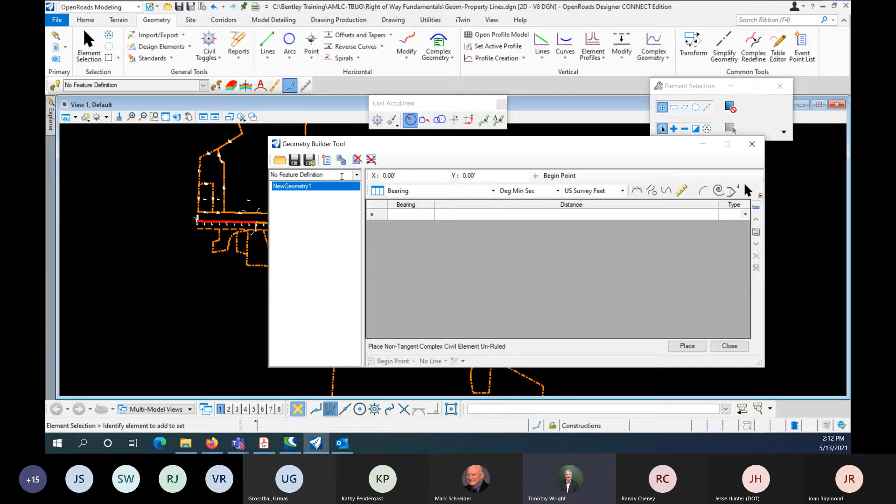Feature definitions, if you aren't aware, really drive the software. I cannot stress that enough, how much feature definitions matter. So one of the first things I'm going to do is set up my feature definition here.

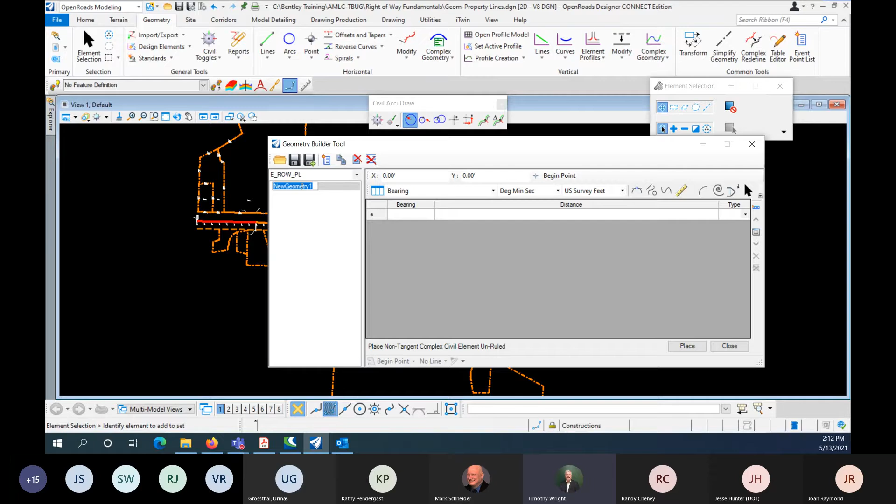We've got one defined for property lines, so I'm going to go ahead and select that. Then I can give this element a new name. Now this is going to be parcel 8 here, so I'm just going to type that in. And now I'm actually ready to get started here.

Now what this tool does is allow us to enter information, a lot of times the way we're used to reading it off the papers, or the legal description. You can see it's kind of row by row based here with a bearing and a distance. But before I do that, there's one thing I want to toggle on, and that's this button right here.

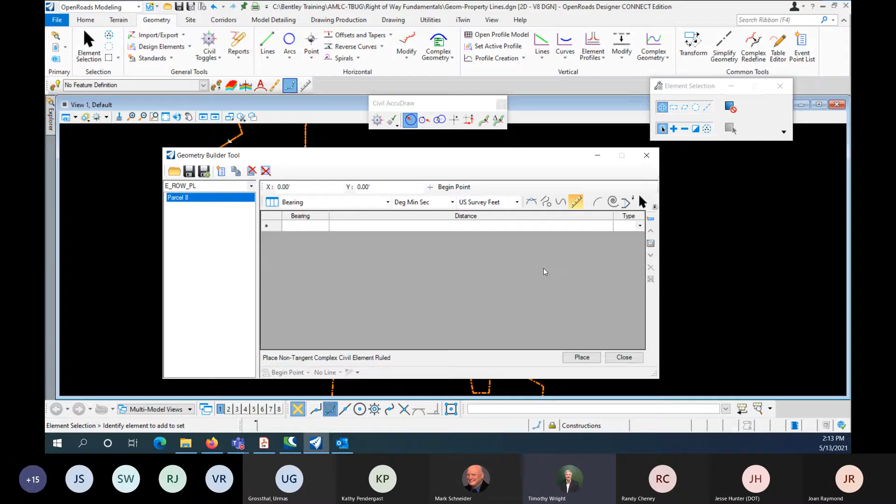And that tells me that I'm going to create civilly ruled objects, and what that means is basically intelligent lines. The lines themselves will know what bearing and distance they are. It's part of the new concept of the way we talk about these objects now.

I'm just going to throw some numbers in here. You can see that I can just use the space bar - that's kind of nice, I don't have to worry about that caret or any of the other ways we used to enter in things. Just hit enter, and it'll take me to the next field there. So you can see I can very quickly enter this data in just by using the space bar and the enter key. Get the numbers right, that's going to help.

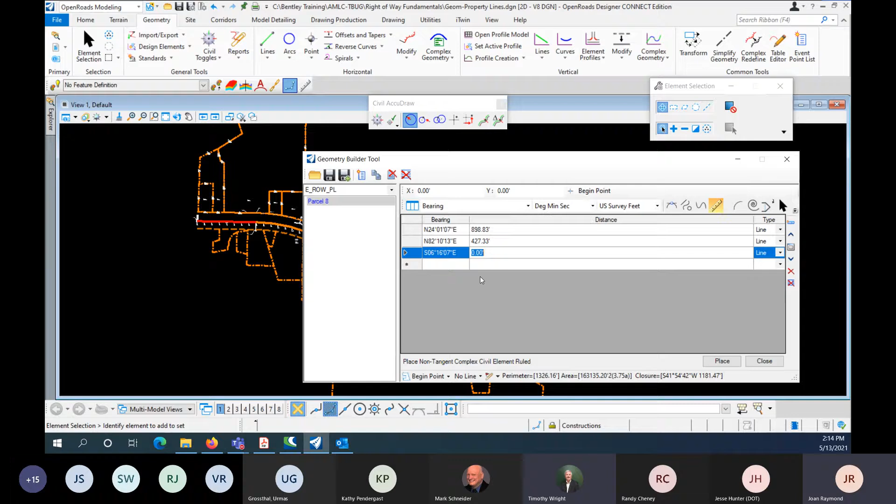As I work through this, feel free to type up any questions you have, or even if you want to unmute your mic real quick and just give a shout out. Like I said, we're going to have a lot of questions, I think, as we work through this, and those are always good - everybody gets to learn something. So I'm just going to finish wrapping this up and bring it home.

North 61, 16, 56 west, and 1074.69. Now, on this last line here, I always like to hit the enter key, but you'll see what it did then is made another element that just goes due north, at a 0 distance.

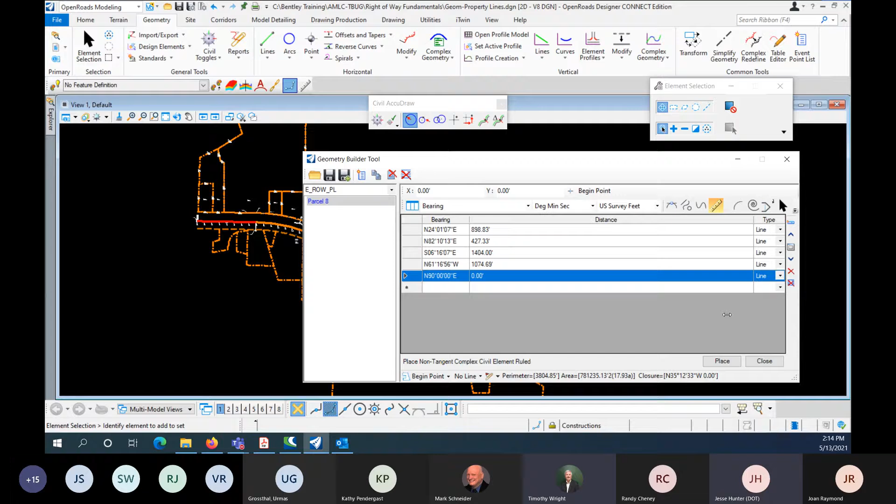So I'm just going to go ahead and select that last line and delete it. Okay, just nice and tidy. Now, before we place this out here, let's talk about some of the things that we see.

First of all, you saw how quick and easy it was to enter that information. You come down here and you've got a space where you can decide how the software interrogates the element. Right here where it says begin point, if I left click on that, you'll see that black drop down arrow. I can say this is not closed, and when it's not closed, that has the software looking at it more like an alignment. So you can see what I get basically as a readout is simply the length of that object.

Now, if I tell it this has got a begin point, it treats it more like a parcel. So there you can see I've got a perimeter, I've got an area including acreage—everybody likes to see their acreage, right?—and a closure. So you can see that we've got a good closure report.

So the way the software interrogates this element gives you clues right up front. You can kind of glance down there and say, oh, look, I must have fat fingered one of the numbers because I'm not closing correctly. So you could go back then and check your data.

Another nice thing about this dialog is we can save the object in an XML format. Now, unfortunately this isn't LandXML—I do have an enhancement request in to make it a LandXML format, but currently it's just kind of proprietary. All I need to do is come up here and say save this file, and that's going to bring it out here, and I can say this is parcel 8.

And what that'll let me do is later on I can bring that parcel back up and make changes on it if I need to.

Okay, so Tim, if you have an arc, are you going to talk about that? Oh sure, yeah. So if you want to put an arc in there, you just change the type here.

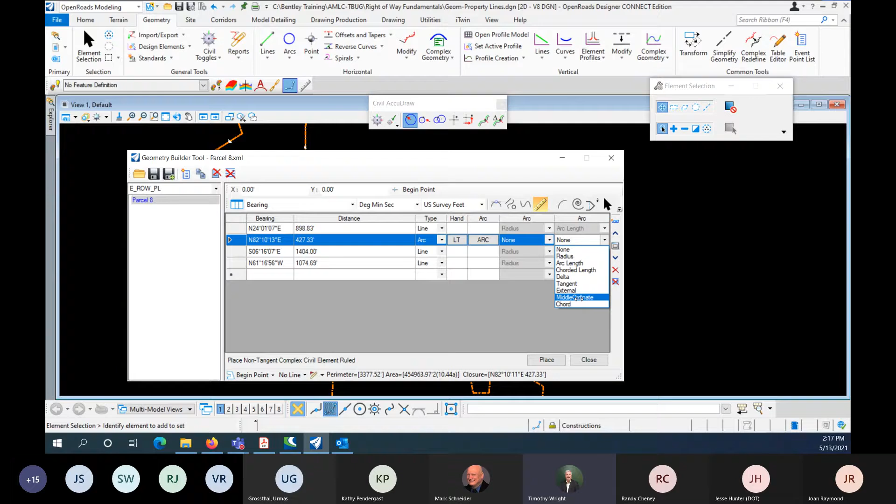And when you change something into an arc, you can define the two different ways that you can bring in an arc, right? First of all, maybe I have the arc length, and maybe I've got the tangent or something like that. You've got different options in here that you can actually tell it as you create that arc.

The different options there. And it will also do degrees of curve—you can put that in there with the D space and then the degree of curve there. Okay.

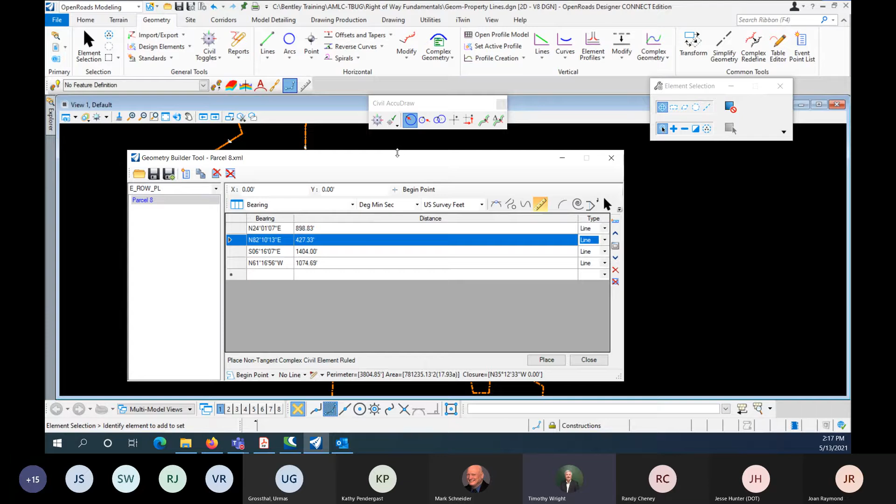Any questions? Now, let me illustrate something that's kind of confusing. If you go through this training on your own by yourself, the software or the training manual does something kind of wonky—all right, that's a technical term. And what it means is it's something that you would never really do in real life.

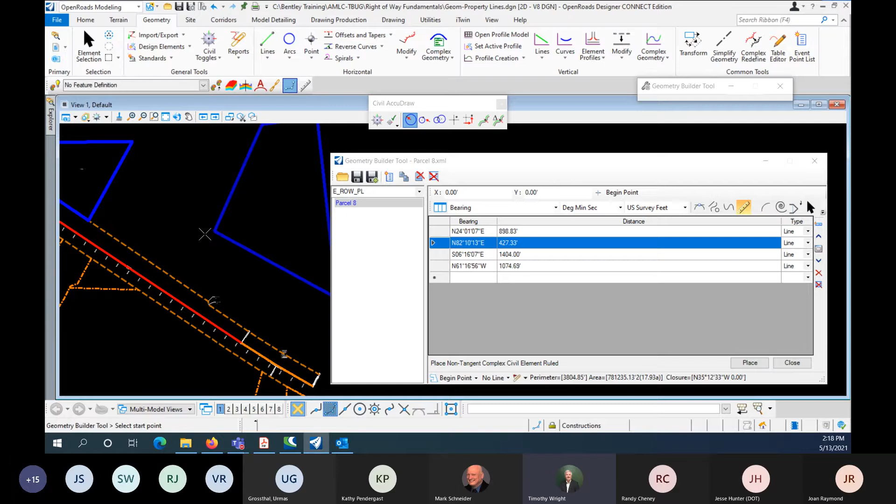So what the training material has you do is come out here and pick a beginning point, and we just throw it out in space. Now, like I said, that's not something that you would typically do, right?

You'd have your point of beginning there, and when you threw in your bearings and distances and all that, those would be real live numbers. But the manual here, the courseware, actually puts things off to the side so that we can use a new tool, and I'll show you that here in a second. So while I agree with the training material, as an academic thing to show you a new tool, in real life this isn't how we put right of way down, right? So just that's my disclaimer.

I got some pretty interesting feedback the first time I demoed this training environment. So I picked my point of beginning there, and like I said, the way I did that was just arbitrary—I clicked the little crosshair here, picked an arbitrary point and just threw it out there. You could also key in that value or snap on the point of beginning.

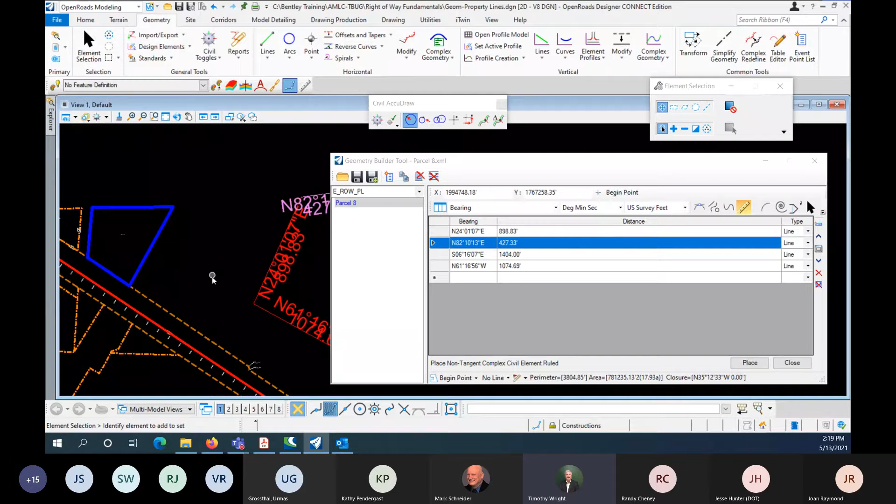And as we wrap this up, hopefully we'll have enough time, I can come back and show you how we would do this in real life.

But now that I've got that all set up, you'll see nothing has really been placed yet. It's kind of in a temporary place right now, and nothing really happens until I hit this place button over here. And now that element actually gets written to the file. Before that, it was kind of just a temporary graphic there.

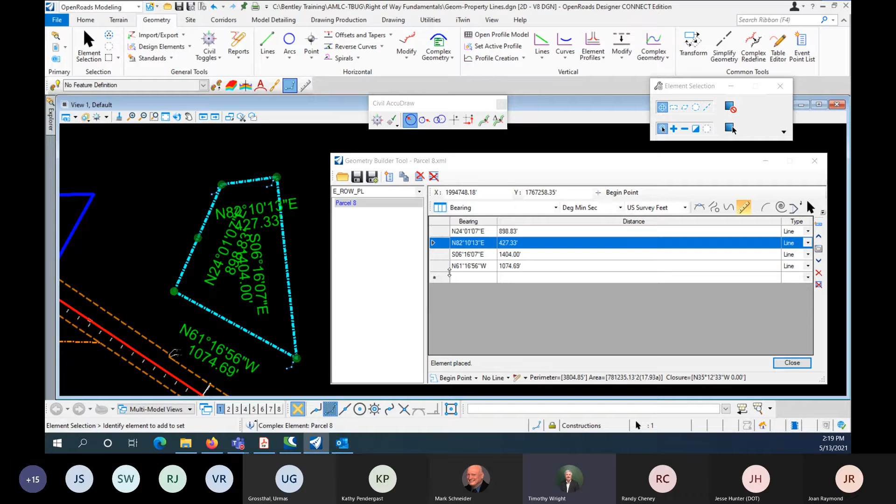So now as I come in and hover over this, you can see that it's a complex element. Its name is parcel 8, which matches the name we gave it here. And if I left click on it, you can see how that element retains that information. So there's my north 61 1656, you can see that represented there.

So now I can go ahead and get rid of this, and I'll go ahead and update my XML file there. Now, like I said, this is something that you wouldn't normally do in real life, but we're going to move this and rotate it.

Now, where do we need to rotate it to? Where is our point of beginning? Well, if we look at our legal description, what it says is from the beginning, or from this monument point here, we're going to go a set distance down the alignment. So that's like a delta station offset. We don't have a station called out, what we have is a distance from a point.

A lot of people look at Open Roads Designer and they're like, where's this COGO tool that I used to use? I want to use this tool because that's how I did my stuff. Well, a lot of times now things are kind of layered. One of the things we're going to do is pick a place point tool, which allows you to place a cell out there. And then we're going to layer it with Civil AccuDraw.

So I've got Civil AccuDraw up. Where that came from is this little windmill icon, the little spiky ball. I just select that and toggle it on and off. Now, I always tell everybody that Civil AccuDraw is either your best friend or your worst enemy. If you understand it, it's a great tool.

You can see in this mode, we can do a station or a distance and direction. We can do them unlinked. We can do a distance, or key in a true XY coordinate, something you can't do with regular AccuDraw because it's always working off of a delta. You can still do a delta, but this is where it gets interesting. Now we have a station and offset, and even a delta station offset, and that's the setting we're going to use here.

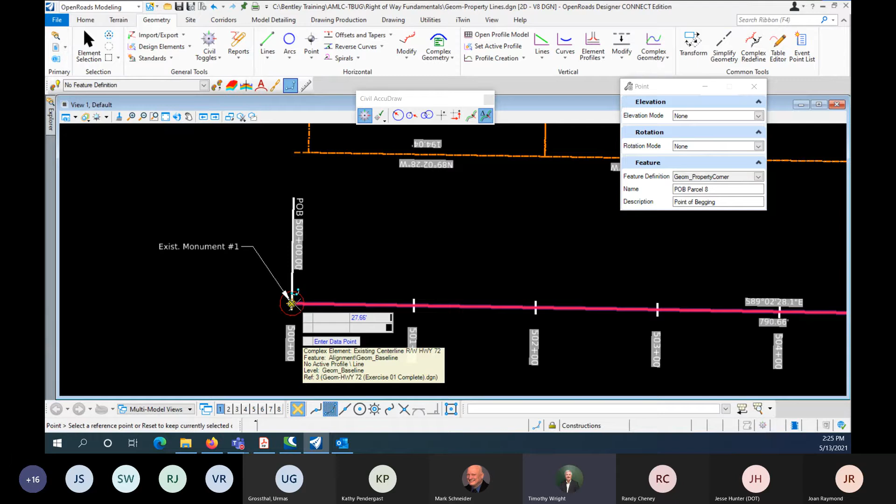So I'm just going to go ahead and set that point up again so everything's good to go, and again spot check it. There we go, at 100 foot. So I've got my point tool all set up, I've got Civil AccuDraw helping me out. Now I can enter that information.

So the delta value that I want is 2647.19. I hit enter and that will lock that in. And then when I bump my mouse, it might be hard to see on the screen, but you can see that little X is locked in at that station point now.

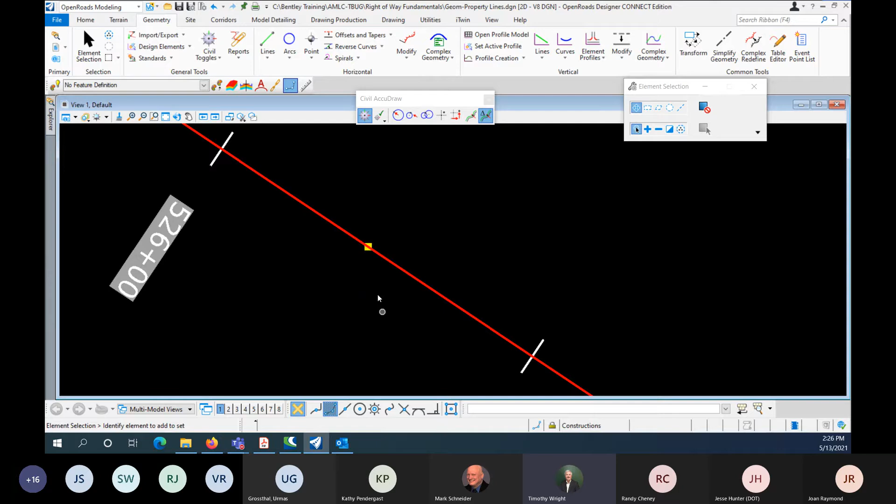Now all I need to do is set the offset to 0 because I want that cell placed right on my alignment. So now that both of those are locked in, I simply do a left click, and there it is. So now if I zoom into that point, you can see that cell up here. If I hover over it, it tells me what it is: point of beginning for parcel 8.

Now, this is another thing that kind of confuses people. When I select that cell, it remembers how it was placed, right? It was placed at a 0 offset and this distance from the beginning. Now, if you look at that, that looks like a chord distance, doesn't it? But that's just because they cut a few corners when they were doing the graphic for this and didn't trace that alignment. I guess they figured that would be a little horsepower overhead or something. So this is a true distance along the element, it just kind of looks like a chord distance. Don't get confused about that, it's actually drawn correctly. So now we've got our point of beginning.

Like I said, the training material here kind of works a little backwards, right? Usually you'd set your point of beginning and then draw your parcel based off of that. But then I wouldn't be able to show you this cool tool called the transform tool, which was located up here in the upper right-hand corner.

And the transform tool is really useful if you want to pick these smart elements up and move them. Because they have rules associated with them, you can't just come up here and pick your move tool and grab that element. You'll see you get the little no-go sign, right? That's because these elements have rules, so you have to use a special tool to do that, and that's the transform.

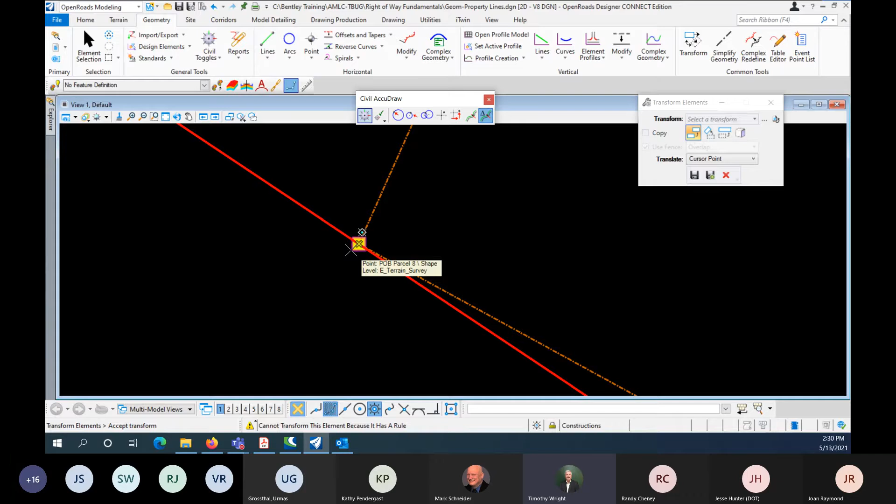Now I'm just going to come in here and snap to that cell there. If I wanted to make sure I got the exact point of beginning, I could use the origin snap, right? That works on cells nicely. And then I'm just going to left click, and that allows us to move those smart elements.

Now, again, I know you never pick up a parcel and move it like this, right? But this is a learning experience. We're teaching you how to use this transform tool.

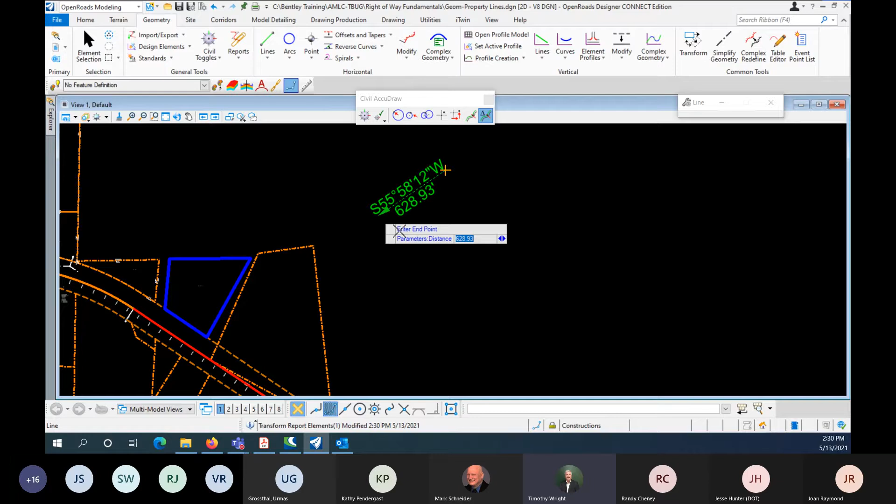Now, for the rotate here, I need to clarify something. A lot of times with the current software, what we're used to seeing when we set the angle is 3 points, right? In this example, you would say, I want to set my active angle, and you'd snap there to the vertex and then to the other leg of that angle, and the software would figure that out. But with the transform tool, they do things a little differently, because remember, we could do a move, a rotate, and a scale all in one go.

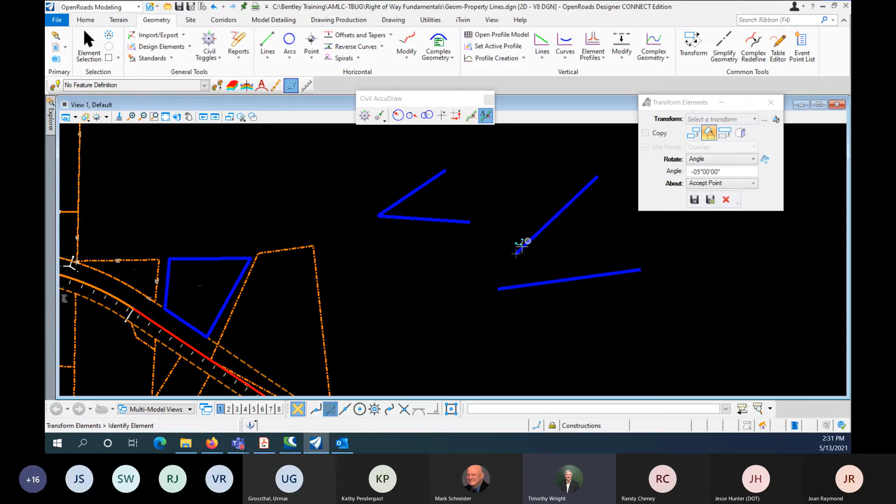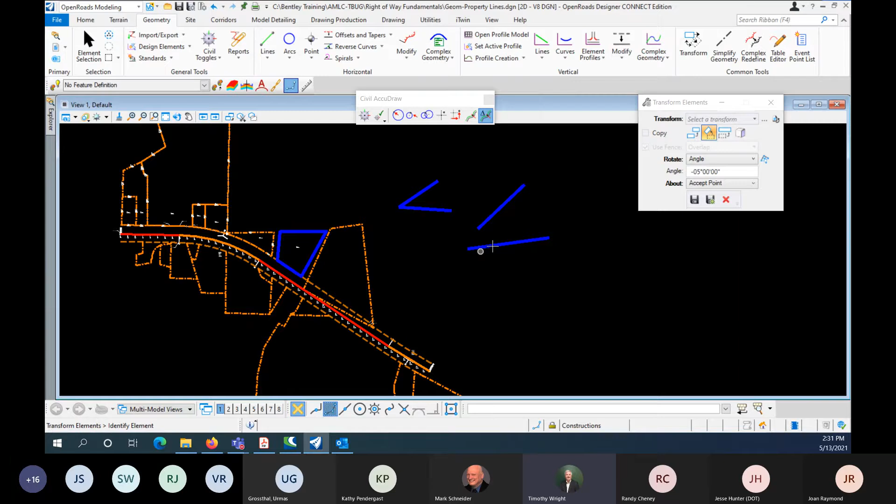So these two lines here may not be connected, right? There may not be a point that I can measure. These two vectors may be disjointed. And so the software allows for that, even though in this case we've already made it kind of 3 points for our angle, right?

So what I'm going to be doing is this will be my first point, and this will be my second, and then I'll come back and make this the third point, and I'll pick down here in the leg. What that'll do is give me the two vectors, and it will find out the angle between those, okay? So the way I do that is I click this little icon here, this little crosshair icon, and select it. And again, I'm going to read my prompts.

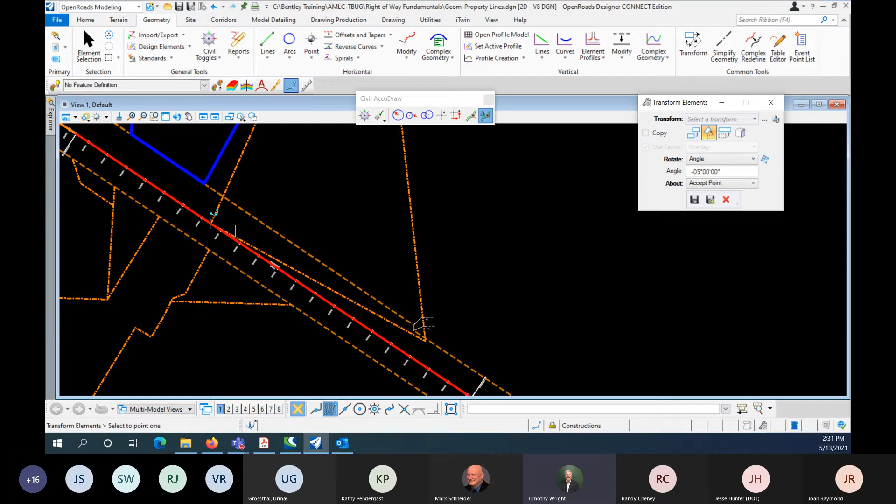This is point 1. This is going to be point 2. Going back for the second vector here, point 1, and I'm just going to pick where we have a PC here, right there. Okay, and that sets up the angle.

Now, let's talk about how we're going to rotate it, and that's about here. Okay, so you can see I've got the accept point. I don't really like that at all. What that does is I have to make sure that I snap back to that origin point. Now maybe you like that, but I don't.

I would rather have either a fixed point, or if you're doing something globally and you want to scale around 0,0, you can use the 0 origin. The element center is another one that I don't hardly ever use, if I've ever used it, maybe once or twice in a rare instance, but I either like fixed point or 0 origin here.

So I'm going to pick fixed point, and again, we've got that little crosshair icon. So now I can easily click that icon, come down here, snap to my point, and now I've got the rotation point. So I've got my angle and my rotation point fixed. The only thing I need to do now is actually rotate that element. So I'll just left click on it and rotate it there.

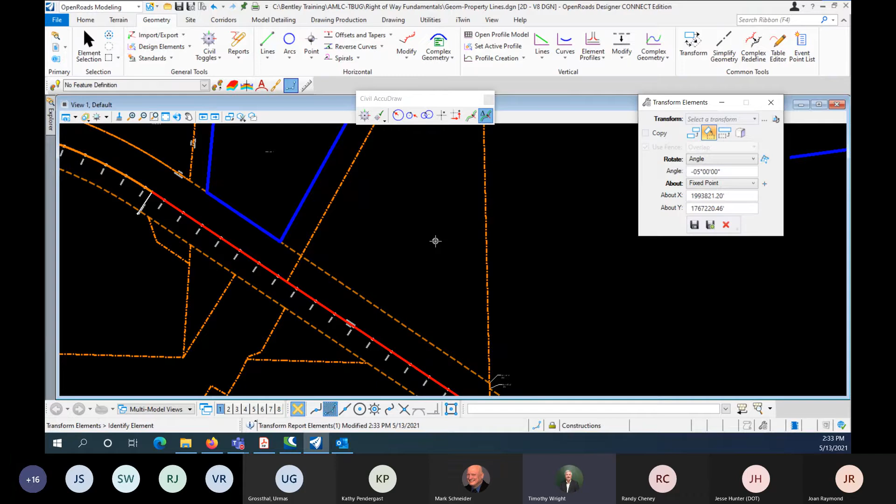Again, please don't send any hate mail. I know we would never do it this way. It's just the training material here.

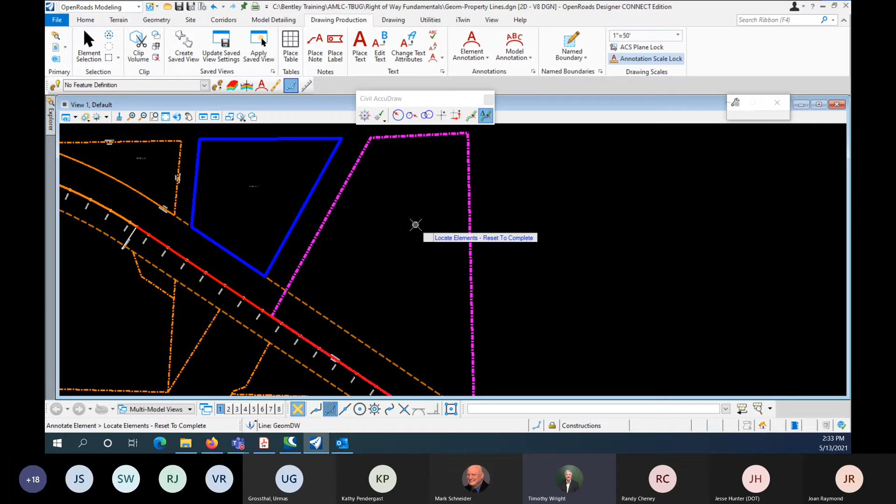Okay, let me clean my mess up here. The last step would be to come up to our drawing production tools and select element annotation. If you recall, these elements are intelligent, so all I need to do is left click on the element, then right click to reset to tell it I'm done selecting elements. You'll see the annotation pops right into place.

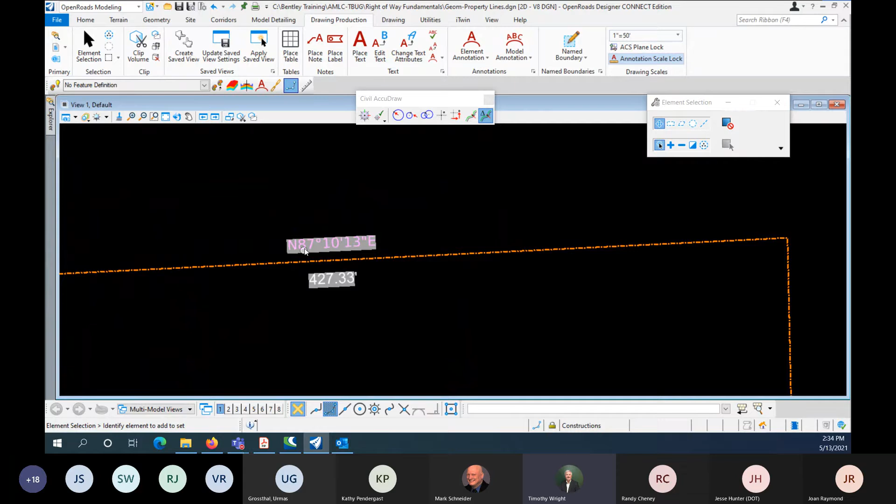Now, the annotation style and all that is totally dependent on your environment. You can customize this to look any way you want. So don't just look at this and say, well, that's not how we do our right-of-way plats. That's fine, you can set it up however you want.

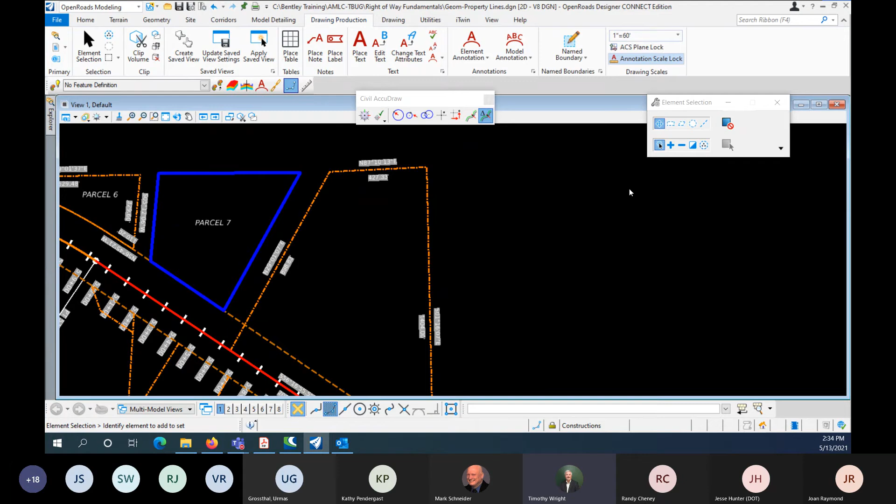One nice thing about this is that it's scaled by the annotation scale. So if I want to use it in a 100 scale drawing, that text automatically updates. You don't have to have 15 different layers or levels for your annotation. You just annotate something once, and whoever is using it picks the scale that's going to be on that sheet, and you're good to go.

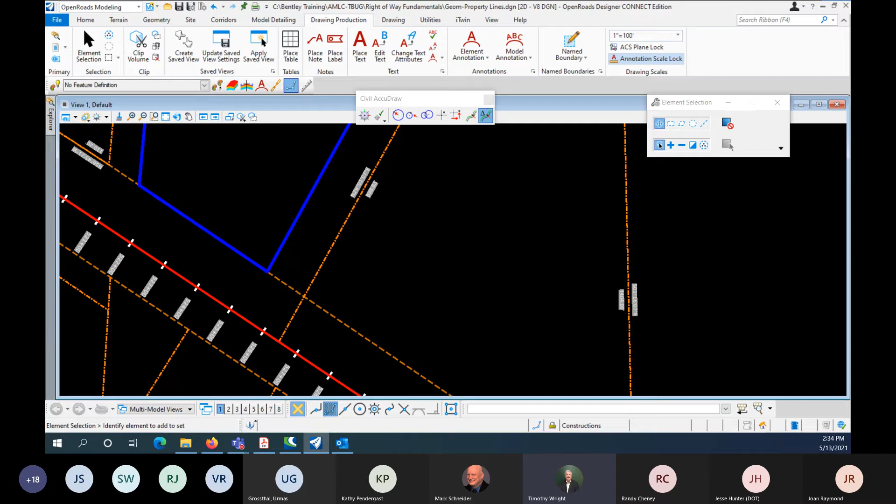So now, any questions about that? That was kind of quick, I know, but we've only got an hour here. So that was basically creating a parcel from scratch.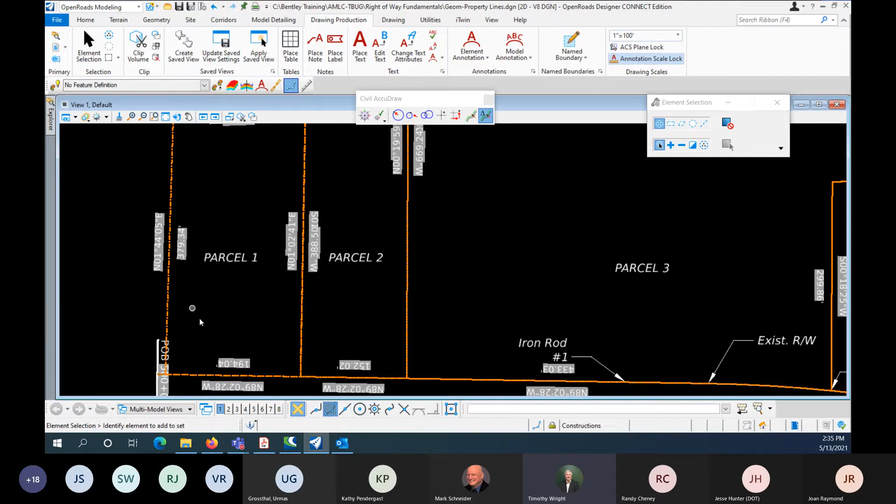What I'd like to do now, I happen to know this first parcel up here has an issue with it, it doesn't close quite right. So we're going to use another tool, under edit, geometry. Here we go, and I'm going to pick the modify tab now. You'll see we have a geometry builder edit.

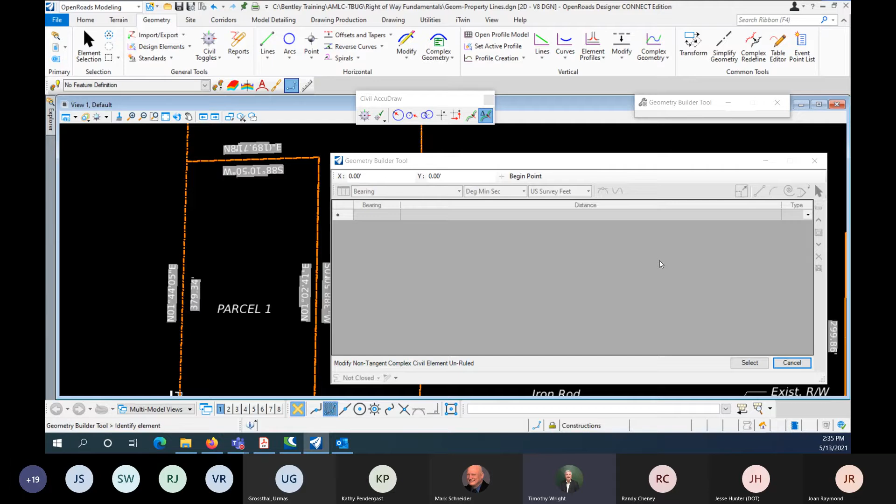If you remember the first time around, we picked geometry builder. This right next door is geometry builder edit. I'm going to left click on that. You'll see it's the same basic dialog, but nothing happens until I come over here and select an element. Once I left click on that element, it pulls it in, and now you can see that information.

Remember I said you can change how the software interrogates that element. So I'm going to go to begin point here, and now you'll see we've got a closure error. Another way to see that is we can run a report on it. Now we've got two different checks here: a map check and a geometry check.

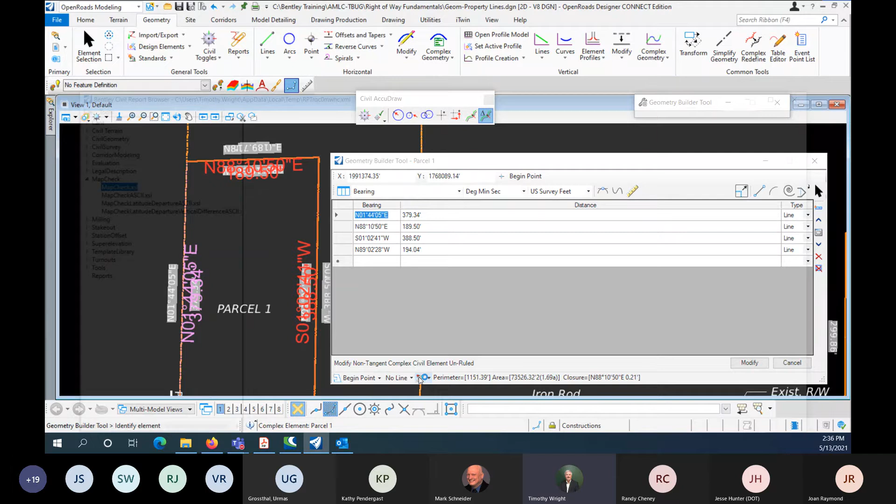A map check is kind of like a parcel check or something. So I'm going to click that, run that report, and there you can see the map check report, and there you can see where we're busting by a considerable amount.

So what we find out is that when we were entering this data here, as we go through it, this number right here, 189.5, should be 189.71. Okay, so we just made an error typing things in. That happens, right? So how do I fix that?

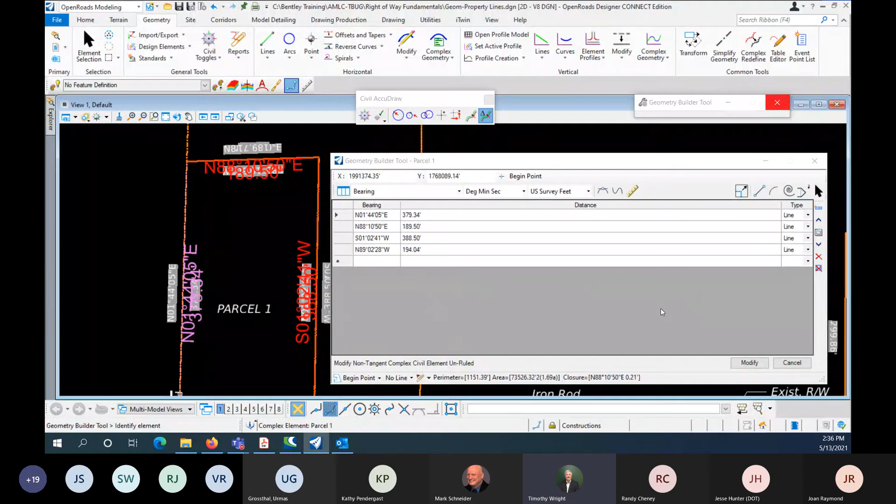Well, you simply come up here, select it, and change whatever you need to change. This is like a live field here. So I'm going to do 71 and hit enter. And when I do that, you'll see that closure then looks pretty good.

If I want to run that report again for archival purposes or whatever, now you can see we've got a good closure. We also have acreage, right, square foot and acreage here. So again, there's a lot of information in this report.

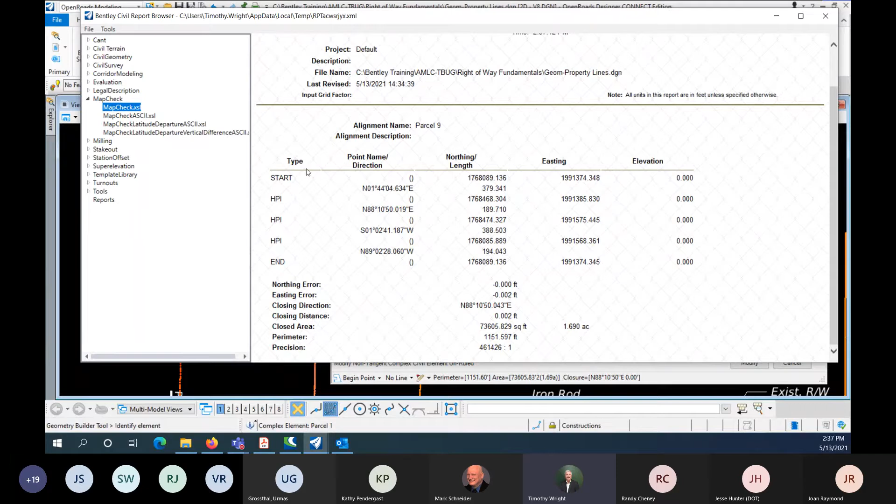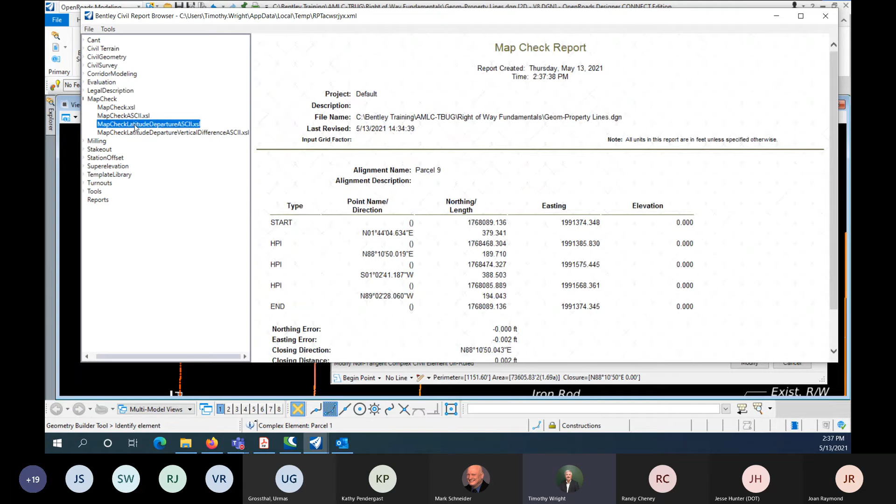If you haven't seen reports in ORD, just real quick, you can pick different style sheets to run that data through, and you can get some different reports off of that. So if you need to push that out to another program or something, you can see that. Now these are style sheets, so if you have somebody in the office really good with low grade programming or HTML stuff, they'll probably be able to take one of those and tweak it to your own custom needs.

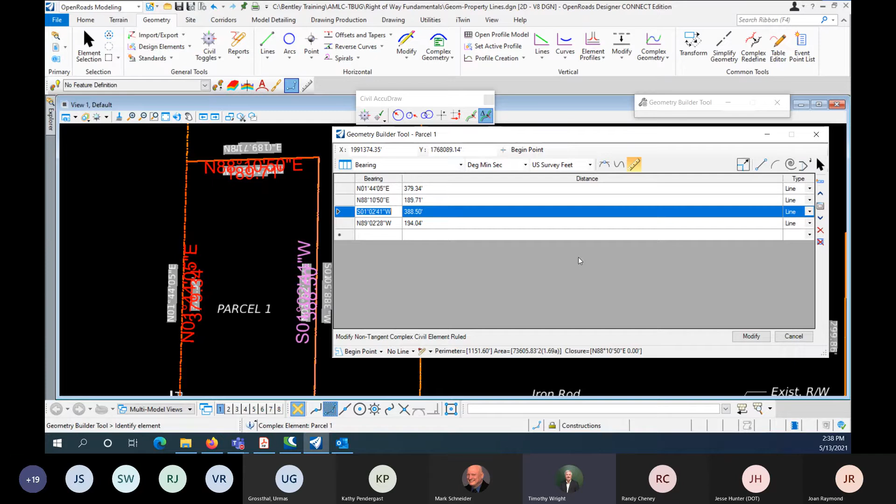Okay, so we've made our change, we found out what the error was with that parcel, we ran a report on it. Now we need to write it back to the file. But again, before we do this, make sure to make it a smart element, okay? I almost wish this was in neon or something, like it would flash and say, hey, make things smart, okay?

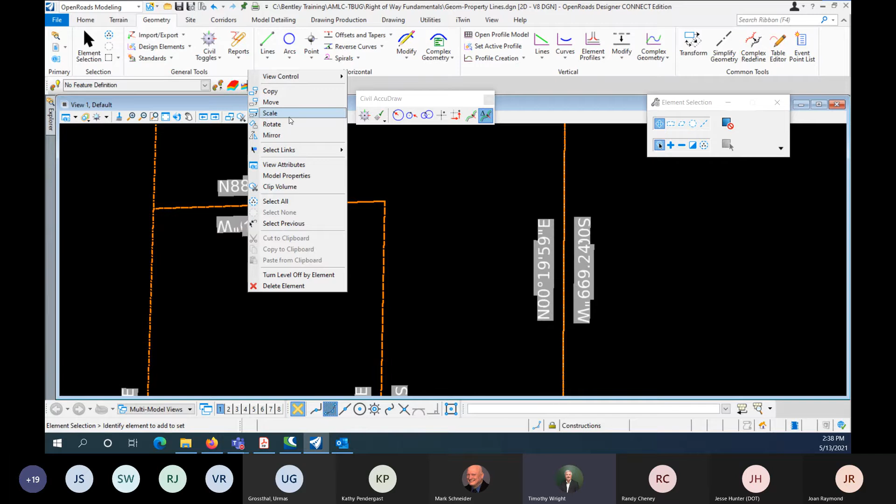So then all we need to do is come in and modify that element, and it says, hey, I'm going to simplify this, and I might remove some of the rules. And of course, that's what we want, right? We want to fix our parcel there. Now, I forgot to point this out, but let me just move these out of the way here.

That's kind of nice too. Even after they've been placed, you can see, you can pick those up and move them where you need to. But you can see that distance there has been updated, 189.71 now.

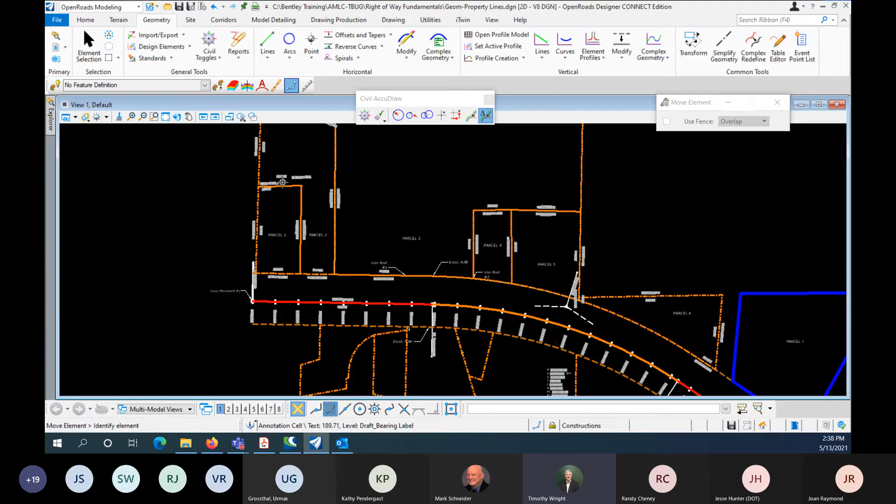All right, we've got one more thing to do over here, and this time we're going to take a dumb element. What I mean is something drawn with just smart line, not that it's anything personal, but there's no intelligence on this element. If I select it, you can see it's just a shape, right? It doesn't know what those bearings and distances are. However, somebody took the time and drew it correctly.

So what we're going to do is pull this into that very same tool, the Geometry Builder Tool, and I'm going to select this shape here. Now really all we need to do is take this and promote it up to Smart Elements, because like I said, it was drawn correctly. We've got a good closure there.

Now this is something that trips up some people - they don't realize that this little icon right here means it's basically a graphic element. Surveyors see this icon when editing their chains, but on the engineering side you don't hardly ever see this icon. What this means is that it's just a graphical element. Well, I don't want that, I want a smart element. So the first thing I'm going to do is turn that off.

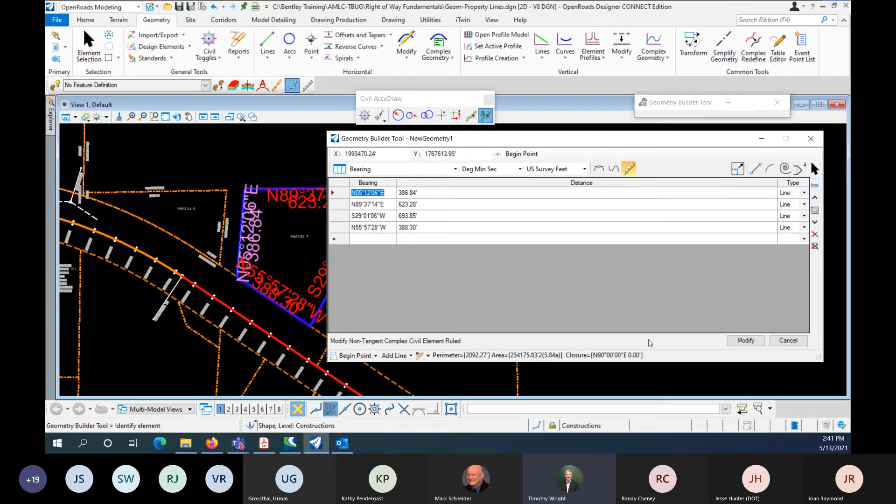Once I'm done with that, all I need to do is go ahead and modify that. You look at that and you're like, well, okay Tim, nothing changed, what's the big deal? Well, nothing changed, but look at that - now when I select on it, it knows that it's smart, right? It knows what its bearing and distances are.

The only thing we need to do is help it out a little bit here. I'm going to select it, and then bump my mouse, and what that does is bring up the context-sensitive menu - this is really where you do 90% of your work in ORD. So you select the element selection tool, left-click on the element, bump your mouse a little, and that menu pops up.

This is different for each element. If it's an alignment, it would have different icons that show up. If it's a terrain model, it would be different still. But almost everyone has this first one, the properties, so I'm going to select properties here.

And you can see the problem - we've got a feature definition here and a feature name, but we don't have anything defined. So I'm going to come in here first and change that feature definition back over to right of way, if you'll remember we picked the property line. And then I'm going to go back and change its name - this is just going to be parcel 7. So I make those two quick changes.

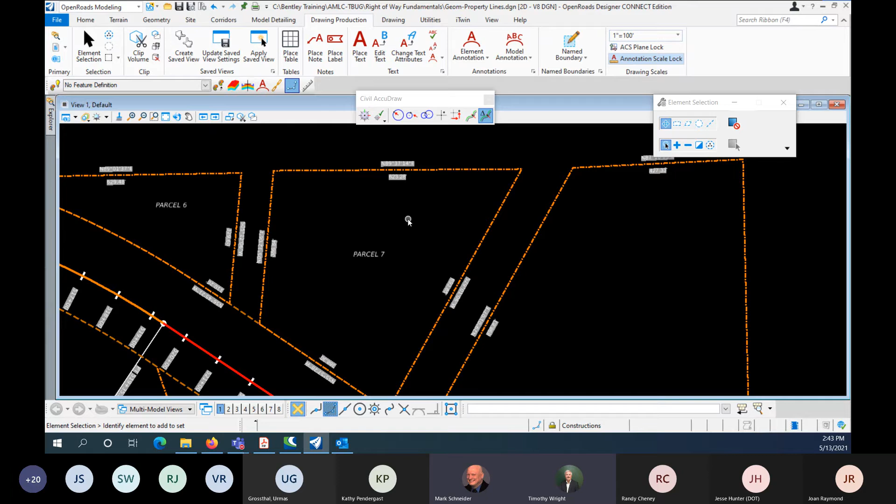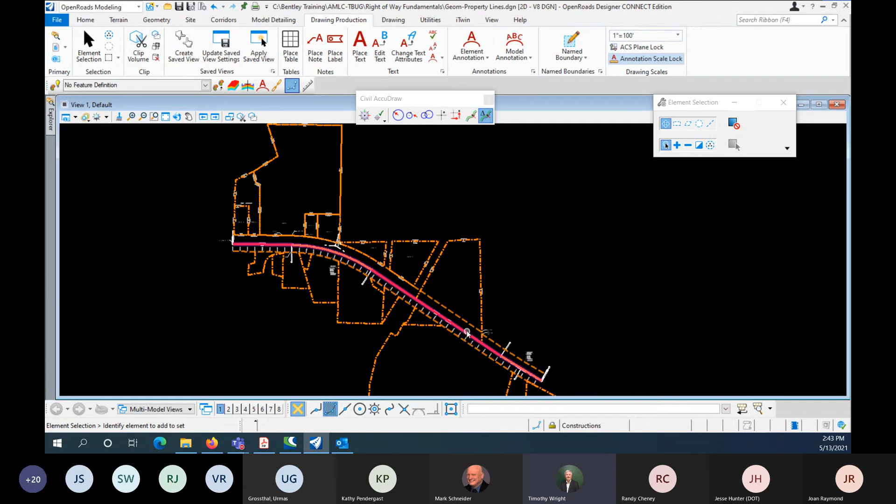All right, so now let's do something that we all do, like a temporary easement or permanent taking or something like that. We're going to go back to our tools, and I'm going to show you one more thing that's really, really awesome about Civil AccuDraw. You can actually customize it yourself.

Now what you have to do is you first have to turn it on. Again, that's that first icon. Don't forget that this is how you turn it on and off, don't just click that tool. Once I have AccuDraw active, I can come over to this second tab here.

I can go down to my favorites. Now if you look at the favorites list here and look at my menu, you can see it's a one-to-one relationship, right? So here I've got bearing and distance, same thing here, distance and direction. This is my distance and direction unlinked. That means you're taking your distance from one element and your direction from another. So hopefully you get the idea here, this is basically allowing me to customize that menu.

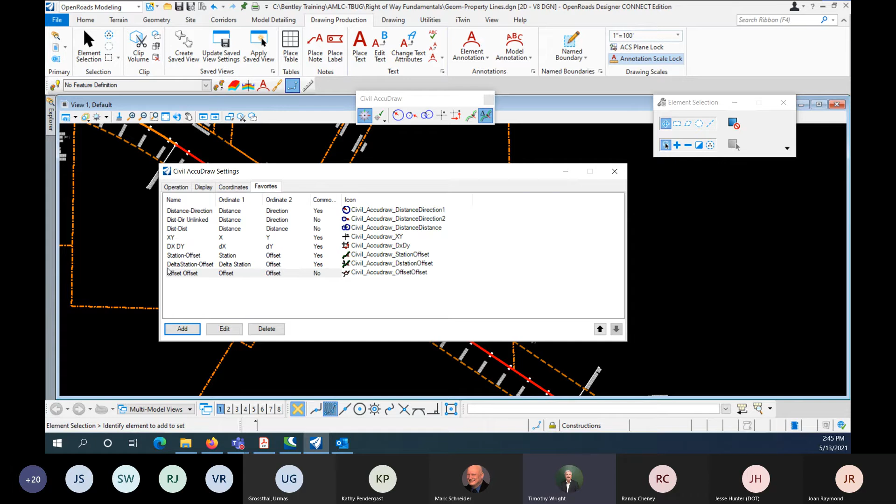Now what I want to set up is a brand new tool, and I want to do it from offset. So I'm going to click this add button here, I'm going to give it a name - offset offset - and then I get to pick what I'm playing with, right? So the first thing I'm going to do is an offset, and the second is going to be an offset too. I tailor it just like the tool that I named. Obviously those can't have a common origin, wouldn't do you any good to have the same offset twice, so it's going to default to a no there.

You can pick this icon off of a drop-down list here, but I'm just going to leave it with the one that it threw out by default. It looks like, I don't know, one of those little origami swans. To me it's supposed to be two different alignments with the offset, but I'm going to call that a bird. So I'm going to go ahead and close this dialog now.

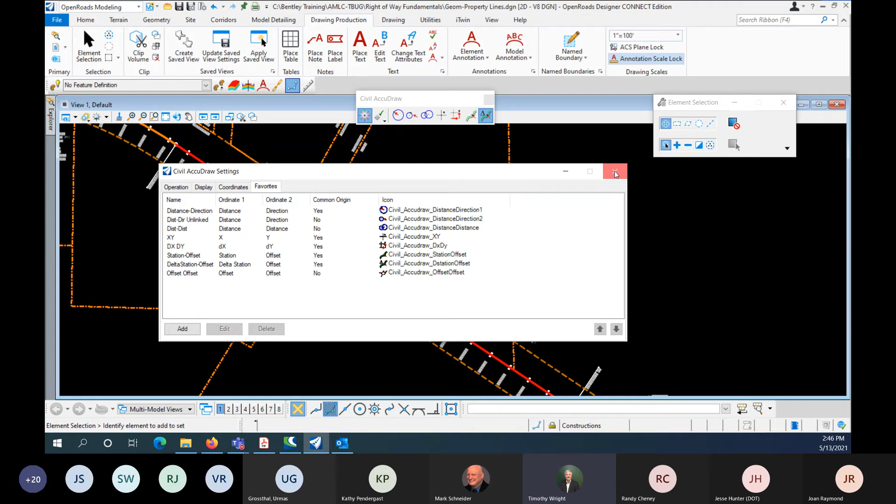And what I have to do is just cycle Civil AccuDraw. So I turn it off, I turn it back on, and boom, there's my new tool, right? So how cool is that, you can make your own tool that quickly?

So again, what we're going to do is we're going to set those iron pins up. The first thing we're going to do is set up our Civil AccuDraw, get that ready to go, and then we're going to go back to the geometry tools and play pick point again. I'm going to use this pick point, but all you COGO fans out there, if you come down here and you locate point, and come over here to your method, this ought to alleviate a bunch of your fears.

We've got a traverse method to locate, we've got points of intersection, points on a curve, you've got all sorts of different methods. So again, it's not that we've taken away COGO tools, it's just a different way, or a different way of looking at it. Instead of placing a pin by offset, you pick the place point tool and then you let Civil AccuDraw help you out with the precision input there.

All right, so I'm going to set up my point. Again, I'm not going to deal with elevation or rotation, I don't care about that at this point. And everything resides on this feature definition here, so I'm going to put iron pin set, right of way pin set.

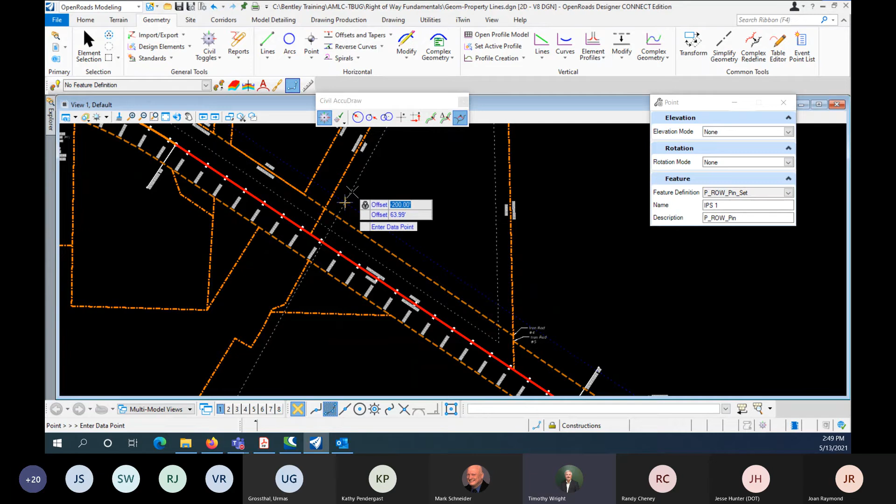Now I'm down in my other field here, and all I need to do is hit that O again on my keyboard - remember, origin. And then now I've got an offset off of both of those two elements. So this, if you remember, should be 0. And that's going to place that point 200 foot off my main line, right on my property line. Okay, so I'm going to go ahead and left click and accept that. And you can see that little triangle in there.

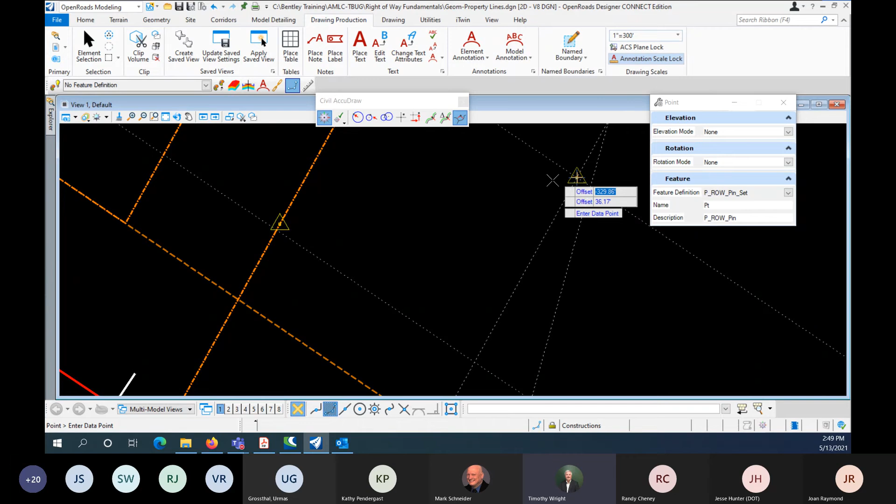Now, one thing I typically do, especially with survey, this comes up a lot, is because a lot of these cells are dynamic, I go ahead and bump things up. That makes the text kind of ugly, but now I can see my cells a little better. And you can always scale them back down, so it's not like a permanent transformation, but boy, does that make selecting things a little easier. So I always tell my survey crews to go ahead and bump that scale up so you can grab stuff easier. It doesn't matter - let the software make things easier for you.

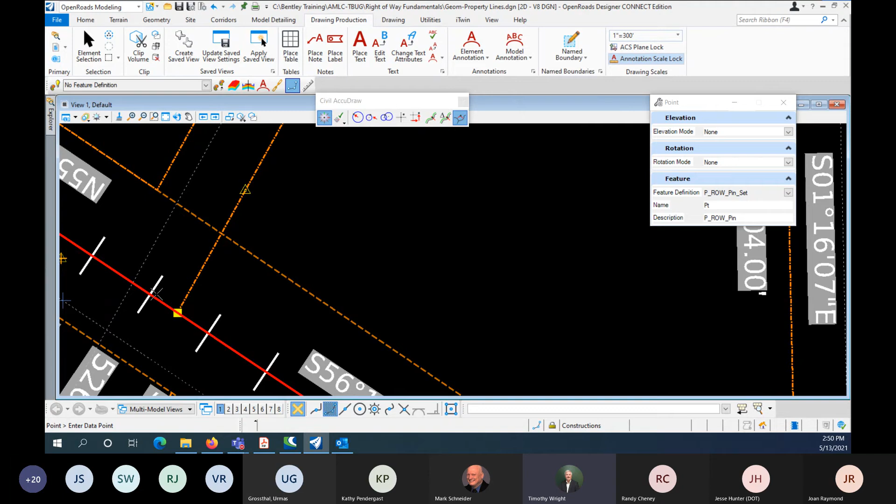All right, so now the next point that I'm going to locate is going to be by a station offset. Now, the only change I have to do is come back to this and type in IPS2. And like I said, that would be an enhancement request, because you always, after every point, you got to come back here and change the name. Now this time it's by a station offset, so I'm going to come up here to Civil AccuDraw and change my mode. And now you can see I've got station offset. So I'm going to key in 530 plus 00, and that's a minus 160 offset, and that locates my point. All I need to do then is left click to accept it.

And then for the third point, what I'm going to do here is just go ahead and set it again by an offset. And I'm going to come over here - hold on, let me bump my numbers on my PDF. Okay, so now this one has an offset of minus 160. And again, we want it to be right there on the property line.

So I'm going to hit O. Oh, I didn't want to hit O, gosh darn it. Let me hit reset there - I wanted to hit the tab button to go to that second offset. And now I'm going to hit 0. And I hit O again. Gosh darn it, okay, let me try this one more time. 0. All right, well, third time's a charm.

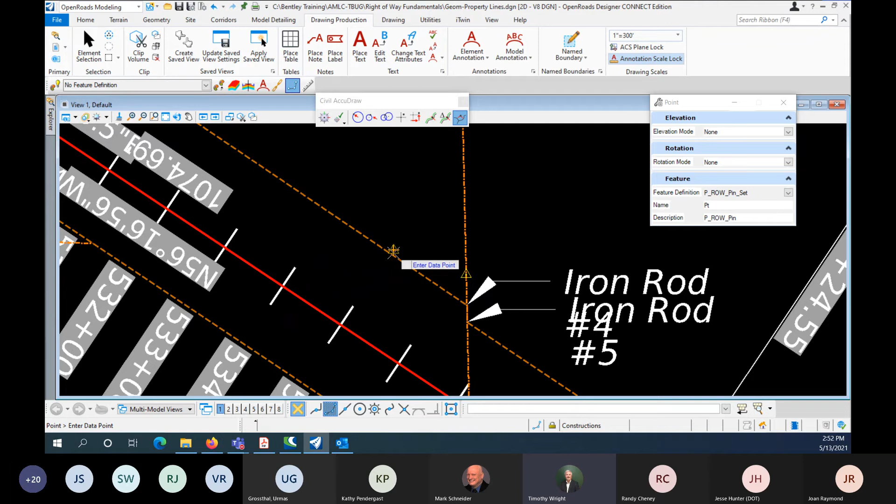And then what I'm going to do is play connect the dots, and I'm going to do that with our smart geometry tools. So I'm going to come back here to the lines. Now, before I do that, I need to set my feature definition.

And that's one of the reasons why I really like this dialog, okay? You get it under standards - it's called the feature definition toolbar. And if you've ever taken a class with me, I pretty much specify I like everybody to dock this. Make it part of your environment, because feature definitions are so powerful, and this dialog deals with those.

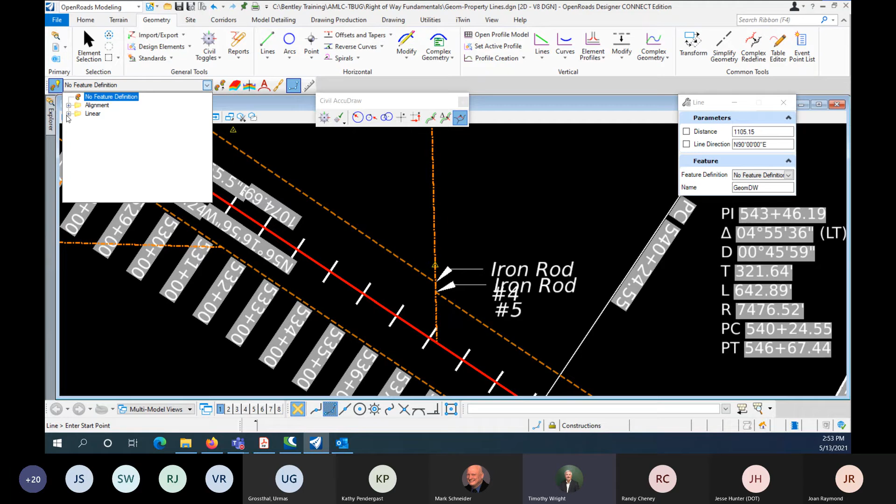So we definitely want to run that when we can. Let me come up to right of way and select proposed right of way, and I'm going to play connect the dots. This time I'm going to start over here at my origin snap, snap to that cell, and actually set my origin snap. Then I'll just play connect the dots.

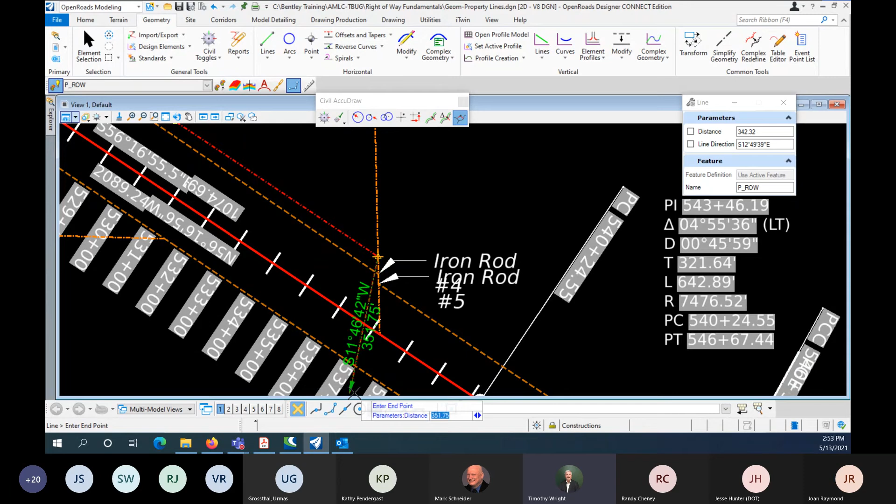Now, OpenRoads Designer does have this chain tool. I personally don't like it, but that's just a personal thing. I'm not saying don't ever use it, I'm just saying it confuses me sometimes. So let me snap to the corner of my parcel here real quick - it's just not my preferred way. What did we do there? Did we get our line? No, we didn't. Undo is a great thing, right? Let me go back and snap there, back to my key point snap here.

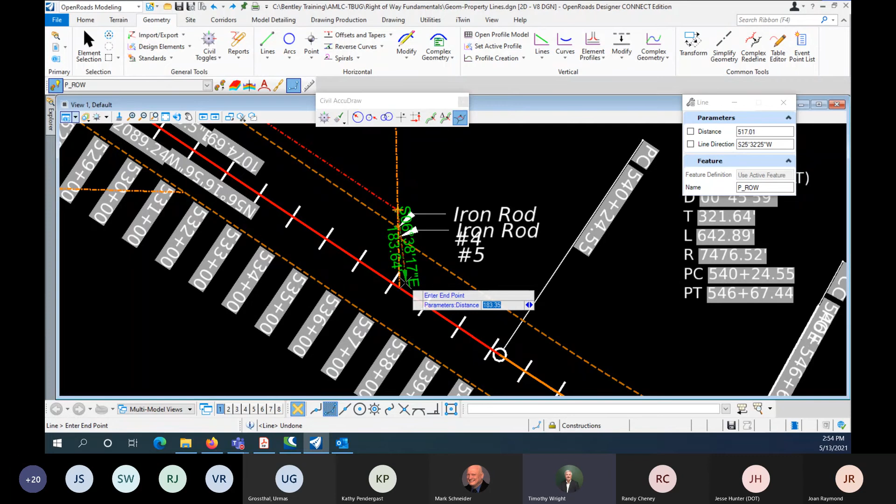All right, and then I'm just going to come home back to the point of beginning. So now what I've got is a bunch of lines here, and they're intelligent, right? If I come up here and select that line, you can see it's got those numbers there. But this goes even further, right? This is one of, I think, the most amazing things about OpenRoads Designer.

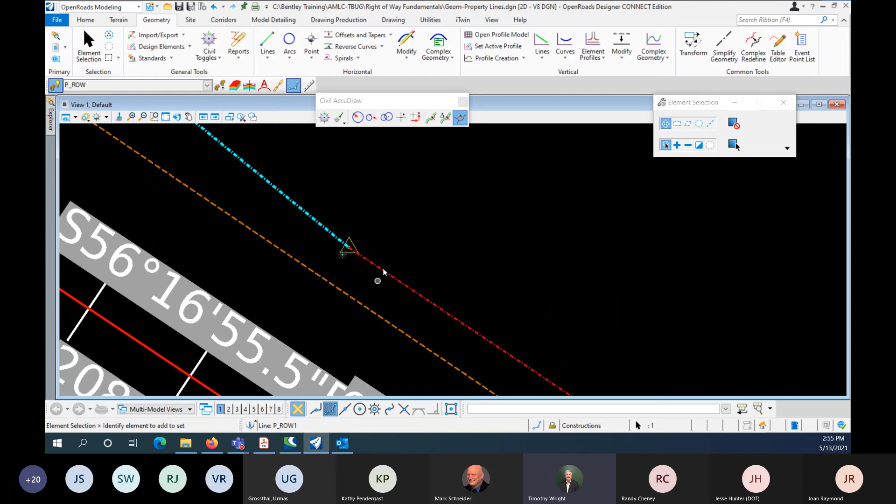Let's say you come back and you need to modify that iron pin there. You can select it - look, I left click on that cell. You can see the offset at -160 and 530 for the station, right? Well, maybe that's 530 plus 50. If I move the point, look what happened to the line work. Because the line work is snapped to my iron pin, if I move my pin, it's going to follow it. Maybe instead of -160, it's -200.

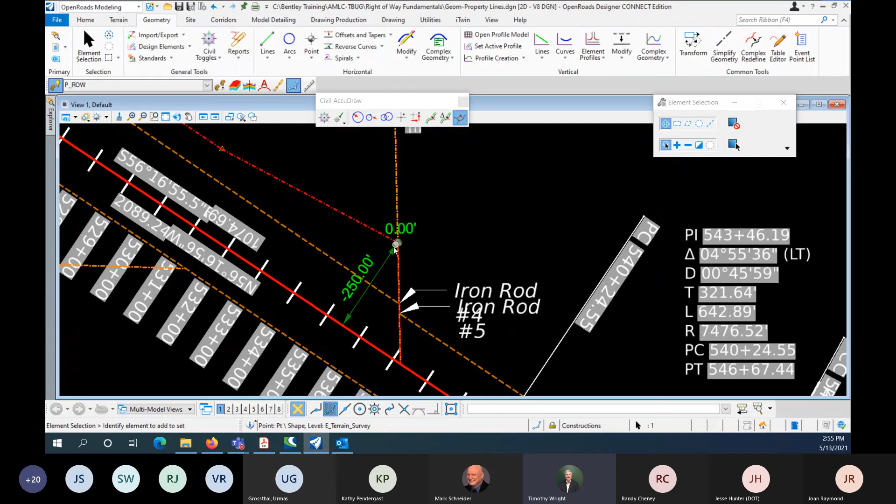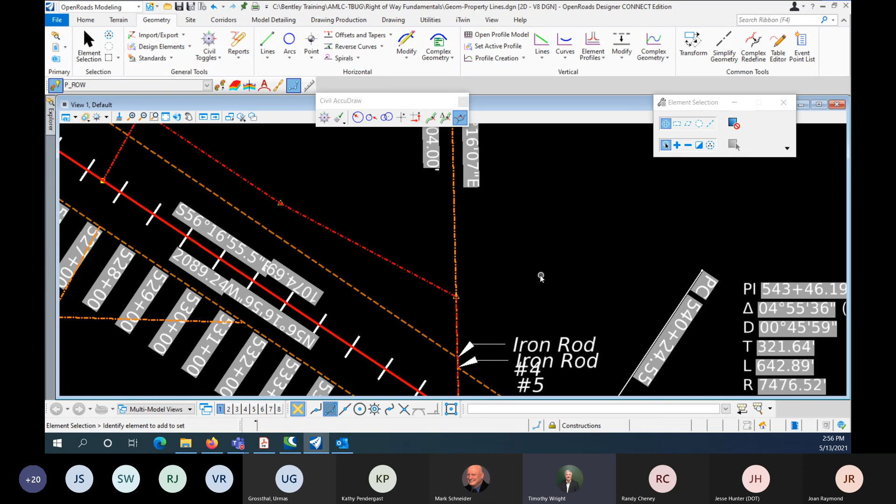Now, here's where it gets really interesting. With our offsets, our intelligent points, we come over here and you see it's 160 and 0. Well, guess what - if I break that out to -250, it's going to follow that property line up. So it finds the point that's 250 off the main line at the property line and automatically modifies it. Notice how that line is following it, because when I placed the line, I snapped to those cells. And when you do that, you set up a relationship - you can see those little icons there. That's one of the powers of this software, that you build off of elements.

Now, that does mean you have to be careful - you've got to make sure you know what relationships you're setting up. And sometimes it's not a good day on intern day, right? You get somebody in the office who doesn't quite understand what's going on, and they can cause some pretty significant damage. So that's why we have backups and training. We're running in the last 5 minutes, just so you're aware.

All right, let me just wrap this up then. I want to get to where we take this geometry and complex it. Now, I could complex this from any point, but it would make sense to come off of our point of beginning here. So I'm going to go ahead and select that. And you can see it accidentally grabbed my parcel there, so I'm going to hit the reset button - I don't want to do that.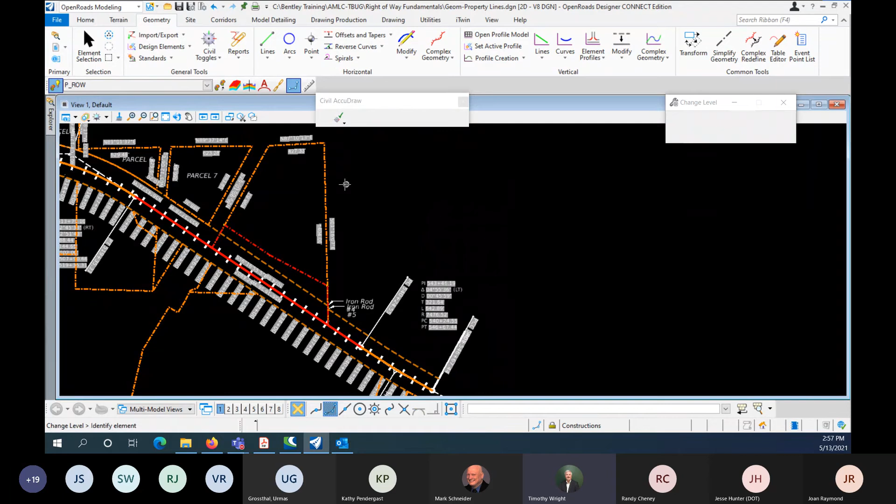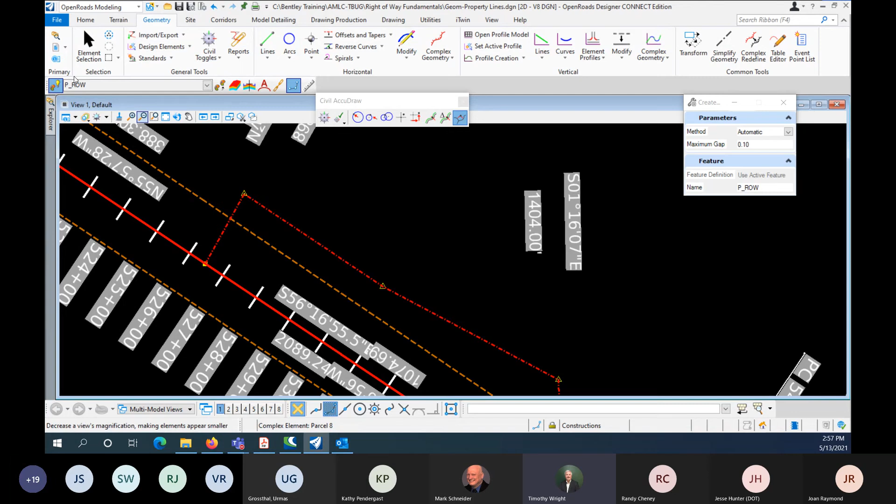What I'm going to do instead is turn off the level for those parcels. What I did there is right click and held, turn off by element, and that allows me to turn off that level. I'll go back and try this again, and that looks good, so I'll accept that. Now here's the coup de grace - let me go back to the home tab real quick. I'll go to levels, turn that back on real fast, and come up to the geometry tools to run a legal report.

So I'm going to locate my first element - that's the proposed taking that I just picked, right? I'm going to give it its parent, the primary reference.

Bandwidth is just how far out we go for station offset, and then reset.

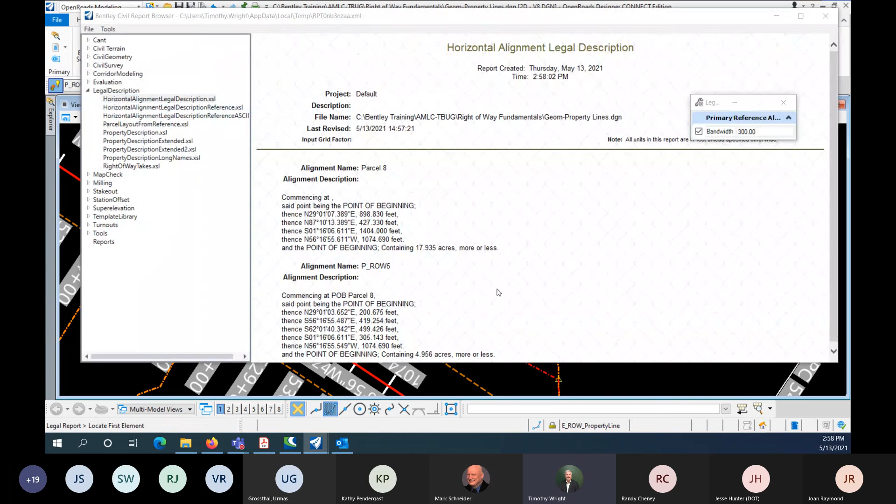Now this is where it gets really awesome. You can see we've got basically a legal description of both our elements. So there's our proposed right of way—I should have probably called that something different, I wasn't paying attention—and there's my parcel 8. But here's where it gets really interesting.

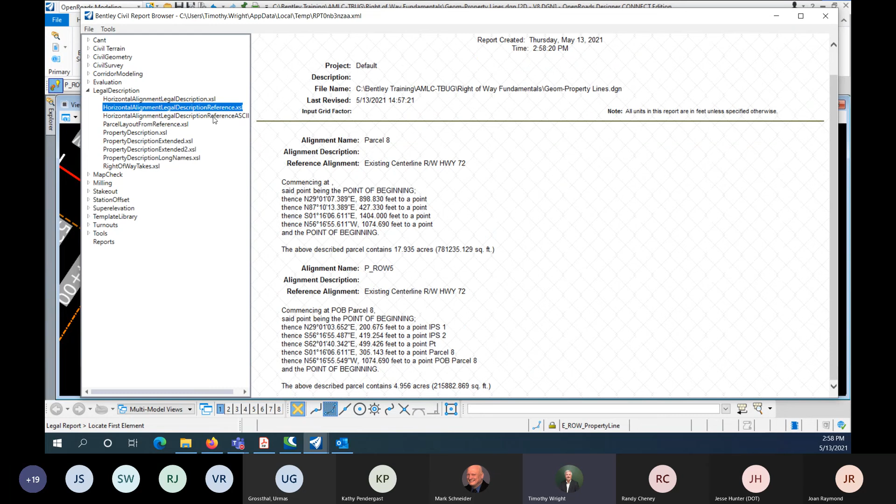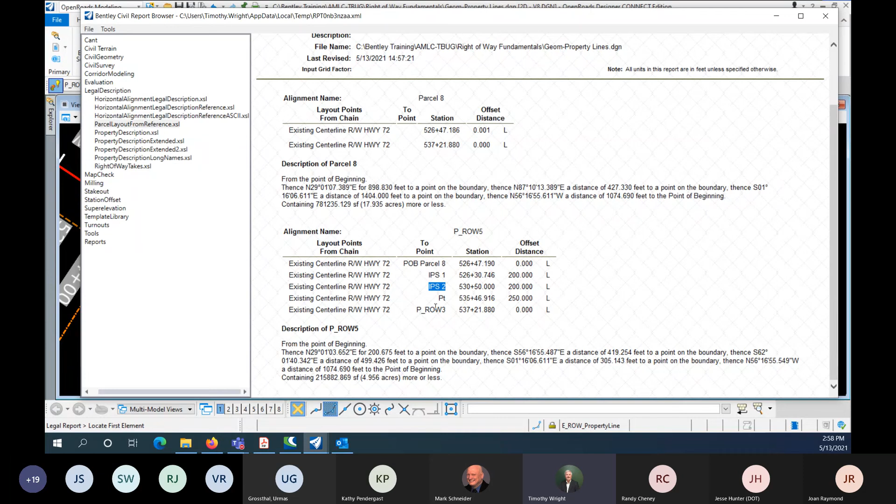You can see we've got that report. We get a little verbose as we start talking down. Oh, you know what, when I placed that third point I forgot to call it iron pin 3. But look at this: it says from my point of beginning, parcel 8 to iron pin 1, iron pin 2. So when you set up these relationships, it automatically matters. Names matter when you're building stuff. Relationships, names, they really do help you out later on in the project.

Pretty cool stuff. All right, we've got a minute for questions.

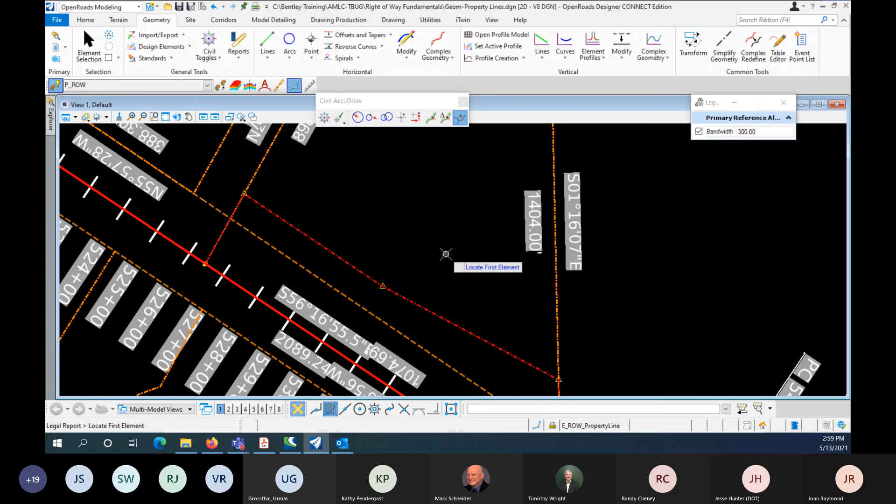Well, people can hang if they need to, but yeah sure. I just need to make sure. Anyone, you can unmute if you have a question or raise your hand or whatever you want to do. I get, yeah, very, very nice.

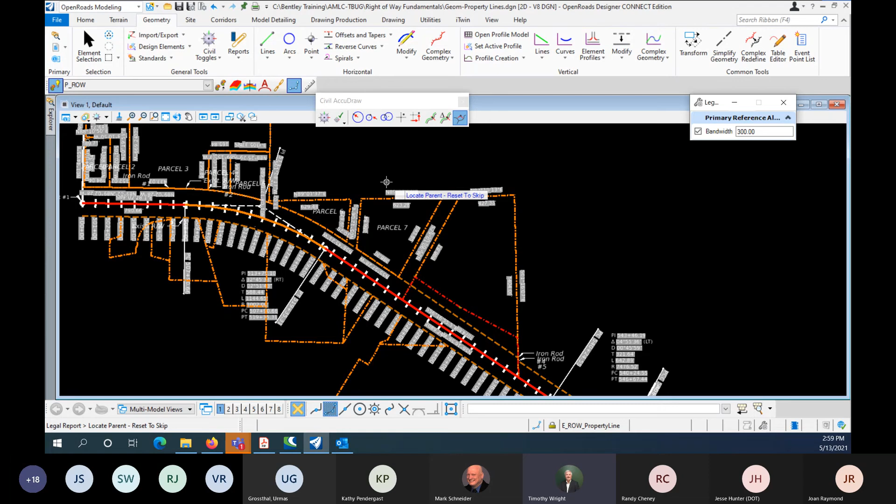So again, this is part of the right-of-way training that is out there in the Bentley Learn server. There are a few quirky things, like moving that parcel. And when we create the existing right-of-way, we have a taper on a curve, which is another thing nobody ever does in right-of-way. So those two things are kind of quirky, but if you can overlook that and just get the training out of it, you'll go a long way. It's a good course. I do like it.

We do appreciate it, and thanks everyone for coming. Could you put the link to the training in the message? I can send it—it's hard to get to everybody. I think we had 28 or 29 people in this session.

So if you want that, hang in there for a second and we'll have Tim stick that in the message box for you, and I'll try to steal it from there and propagate it. I think it's very helpful—I'm ready to go out and do a closure right away. So good to hear. Honestly, once you understand the new tools, they do everything we used to do, but now when you have to go back and make changes, things are a lot easier than redoing everything from scratch.

Let's see, I think it may be under the geometry course here. Yeah, right-of-way fundamentals—so I'll select this path. You just come down to number 5, that's the geometry, and you'll see that. So I'm going to hit that in the chat window for everyone.

And it's kind of nice that it actually locks the content, because when you get CAD drafters and just MicroStation users wanting to go grab graphics that the surveyors put in—you don't want to just go in and mess this stuff up. It's kind of a double-edged sword; it's really powerful, but you do have to know what you're doing, because if the drive doesn't fit in the right of way, you'll just move the line.